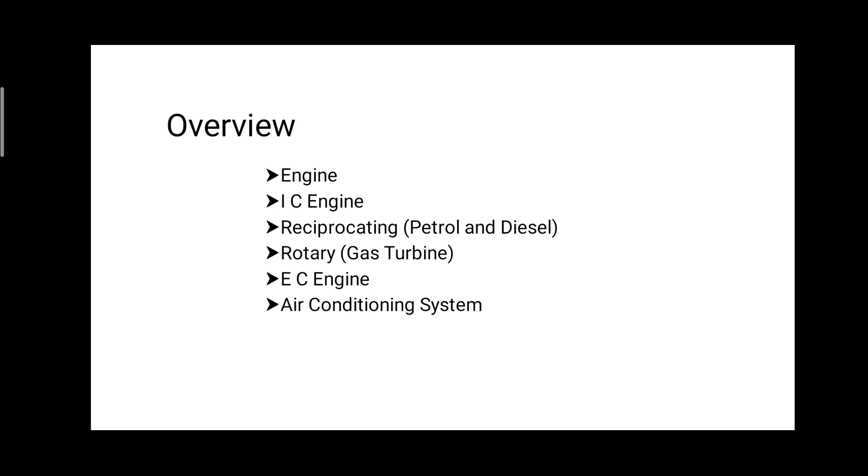If we attach an alternator with the engine, that combination will produce electricity. And if we attach a propeller with the engine shaft, that can run marine ships. If we attach wheels, that can run a vehicle, an automobile. Like this, there are various operational benefits of IC engines or engines. Now, heat engines have types based on burning process. One is internal combustion engine, another is external combustion engine.

Now, what is internal combustion and what is external combustion? By the name, we can easily depict that internal combustion engine is that type of engine where the burning or combustion takes place inside a closed chamber. And in the case of external combustion engine or EC engine, fuel will be burned outside the engine, and the heat energy which will be produced due to this burning will be utilized to run the engine.

Now, for example, we can take steam engine or steam turbine. The heat generated due to the combustion of fuel is employed to generate high pressure steam, which is used as working fluid in a reciprocating engine or in a turbine. In the case of internal combustion engine or IC engine, where generally petrol or gasoline or diesel is used as fuel, the products of combustion generated by the combustion process of fuel and air within the cylinder form the working fluid.

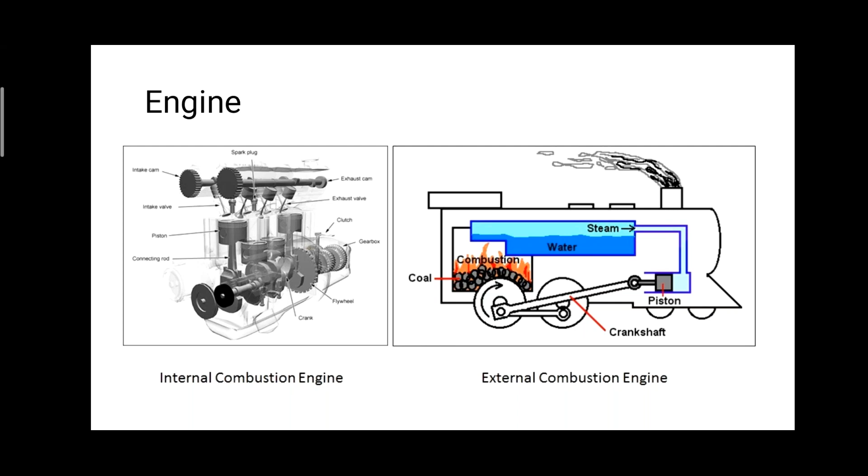Now, even though reciprocating IC engines look quite simple, they're highly complex machines. There are hundreds of components which have to perform their functions congruently to produce power output. There are two types of IC engines. One is spark ignition or SI engine, another is compression ignition or CI engine.

So before understanding the working principle, let us go through some of the important engine components and nomenclature associated with this engine. So first of all, IC engine. You can see in this schematic diagram, every engine component is noted. There would be a cylinder block. Within that block, there would be a cylinder and piston arrangement. The piston can move to and fro within the cylinder. On the top of the cylinder block, there would be a head. Within that head, there would be an inlet manifold and the exhaust manifold.

Through the inlet manifold, air or air fuel mixture will be taken inside the cylinder, and through the exhaust manifold, it will be expelled outside to the atmosphere. Now, there will be valves, inlet valve and exhaust valve, which will be operated by the cam, and they will open and close depending upon the working. And there will be a spark plug located centrally for spark ignition engine. Instead of a spark plug, there will be an injector to spray the fuel inside the combustion chamber in compression ignition engine.

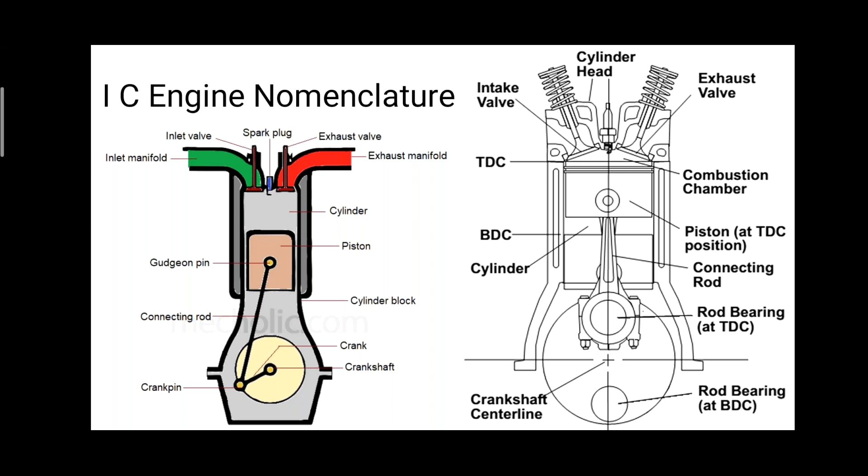Now let's understand the working principle of four-stroke petrol engine or four-stroke spark ignition engine. The principle of operation of the spark ignition engine was invented by Nicholas A. Otto in the year 1876. Hence, SI engine is also called the Otto engine, and the thermodynamic cycle on which it works is called Otto cycle. So can you imagine how beautifully he designed a machine, how beautifully he developed a technology which is still irreplaceable? Maybe we will be using this technology for more than 2-3 decades until other forms of technology which can develop mechanical work become ubiquitous and until fossil fuels become extinct.

There are also two-stroke engines, but I'll be discussing the working principle of four-stroke engine. Why? Because two-stroke engines have much more waste. There will be much more fuel waste in two-stroke engine, which is very hazardous to the environment. So that's why these two-stroke engines became obsolete. So let's understand the working principle of SI engine.

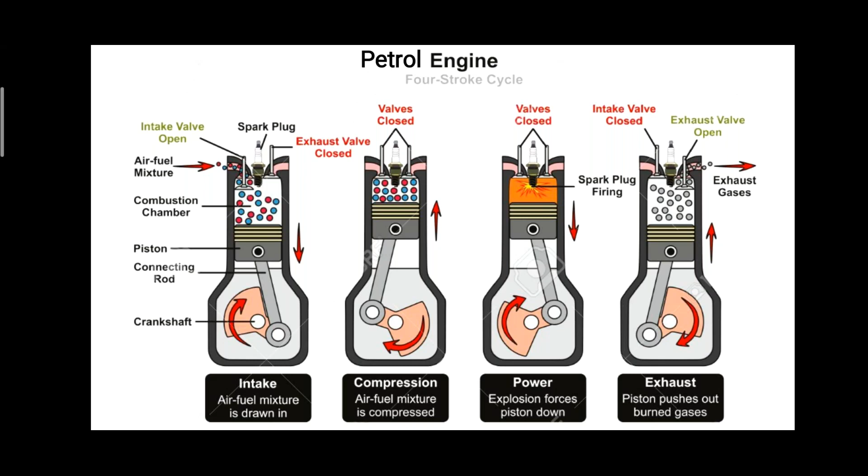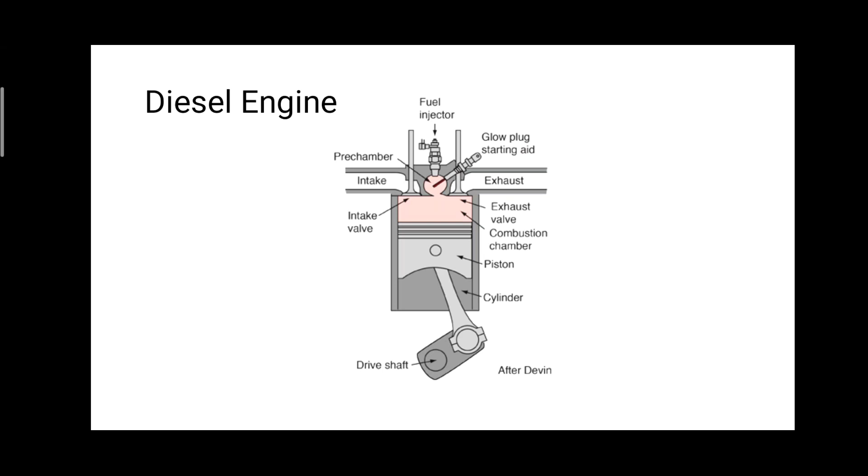I'm not going into those details. Let's come straight to the working principle of the diesel engine. In the same way, the diesel engine also comprises 4 strokes. First of all, intake or suction, then compression, then combustion or power, and then exhaust.

So like the petrol engine also, consider the piston is at top dead center now, and the inlet valve is open. Now, due to cranking, due to self-start, the piston will move towards bottom dead center, vacuum will be created, and that vacuum will be filled up by fresh air, only fresh air in this case, by introduction of fresh air from the atmosphere. Now, during this movement from top dead center to bottom dead center, the cylinder will be filled up by the fresh air. And at the end of the stroke, the engine will operate the cam and close the inlet valve.

Now again, the piston will move towards top dead center. Now during this movement, all the valves are closed. In every direction it is closed. The piston is moving towards top dead center, so it will compress the gas. Now after compression, the pressure and temperature will increase.

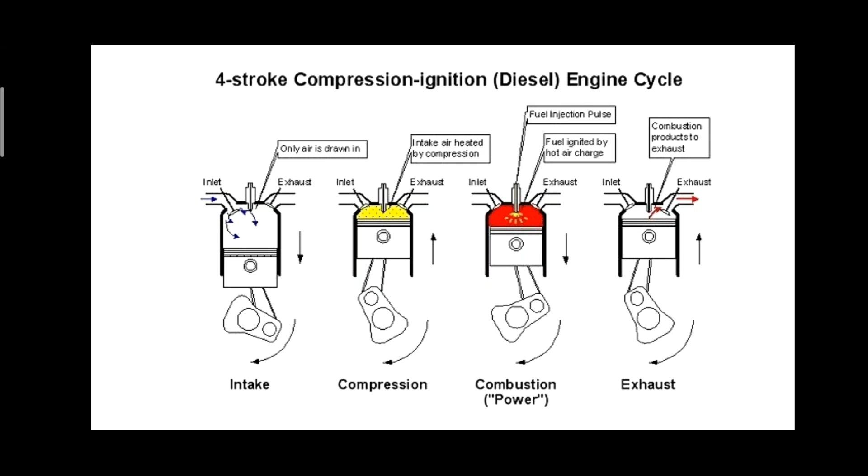My next topic of discussion is the rotary type IC engine. Till now we have discussed the reciprocating type IC engine, reciprocating type internal combustion engine. Now I will be discussing the rotary type internal combustion engine. The rotary type internal combustion engine basically runs on the Brayton cycle. That may be open loop, that may be closed loop. This type of cycle is called gas turbine actually. In the gas turbine, there would be a compressor, there would be a turbine, and there would be a combustion chamber. In the open loop system, fresh air will be taken from the atmosphere.

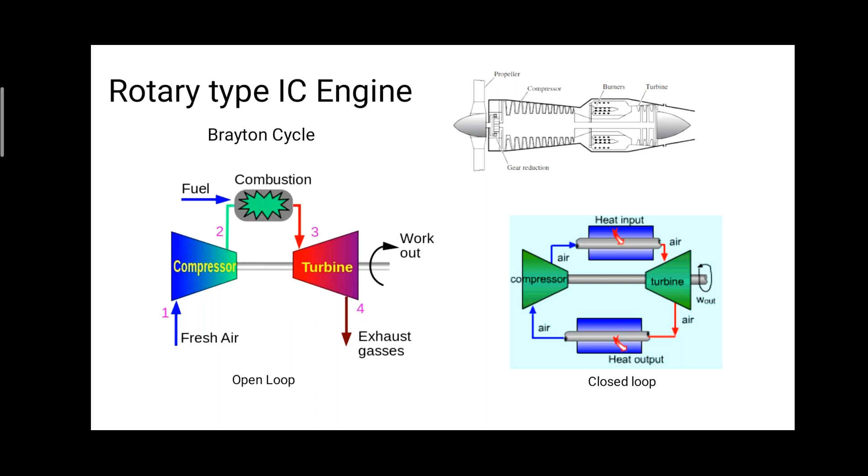Now let's discuss the EC engine. The typical example of an external combustion engine is a thermal power plant. Thermal power plants run on the Rankine cycle, based on the Rankine cycle.

In the Rankine cycle, there will be a boiler. In the boiler, fuel is sent, actually pulverized coal is sent as fuel, and to burn that fuel we need to introduce air, because the necessary oxygen for burning is taken from the air, and the fuel gets burned. Due to burning, the fuel releases a huge amount of heat energy, which is utilized to generate steam from water.

The steam is heated so much that it reaches the superheated stage. After burning, the products of the fuel-air mixture combustion are sent to a stack after a series of operations, because if we expelled these burn products directly, that would be very hazardous to the environment. So some operations are done so that it does not show any detrimental effect on the environment.

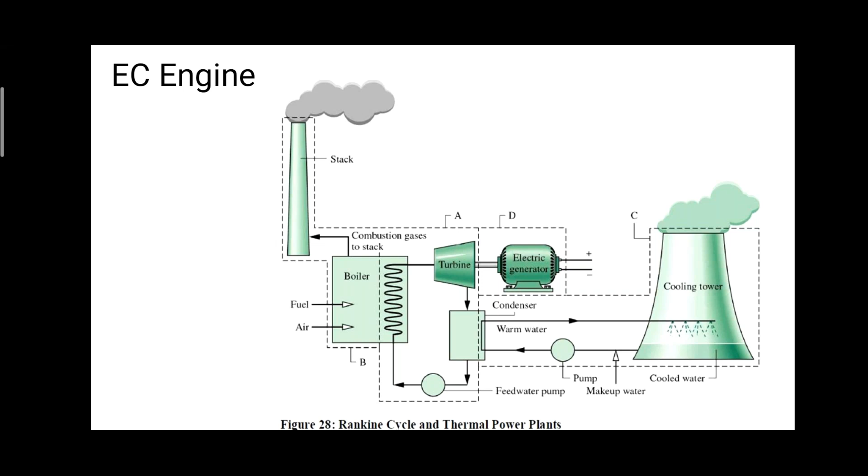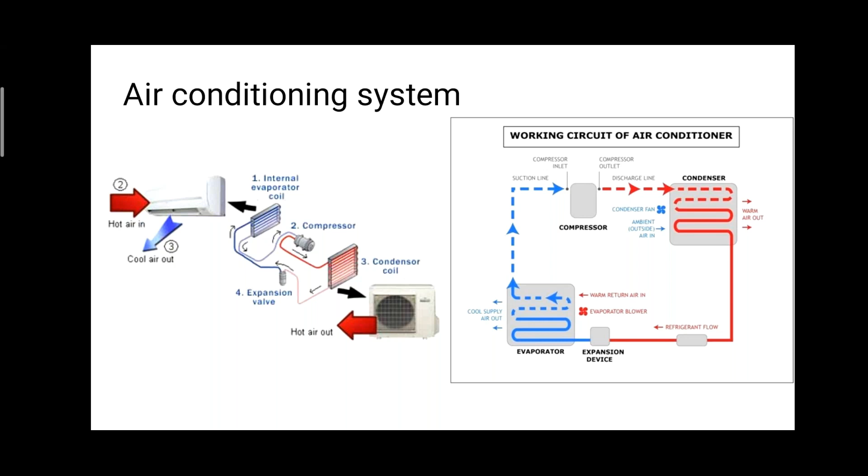So thank you all for keeping patience to hear me. This is the end of my presentation. I hope you have understood a little bit regarding this working principle of the AC appliance.

Thank you, sir. So, Professor Sumit, it was a nice presentation. So should I post the poll now? Yes, sir.